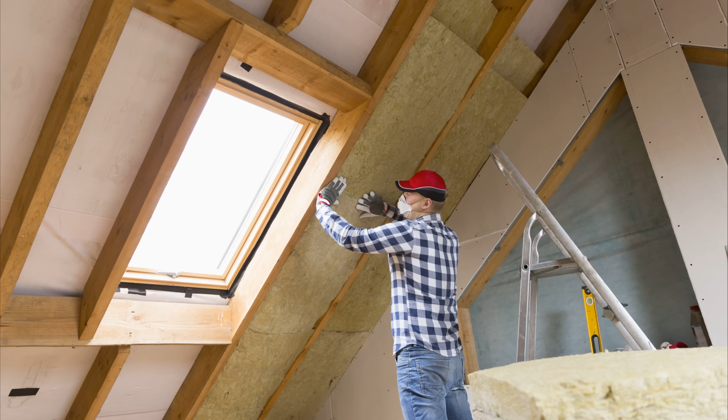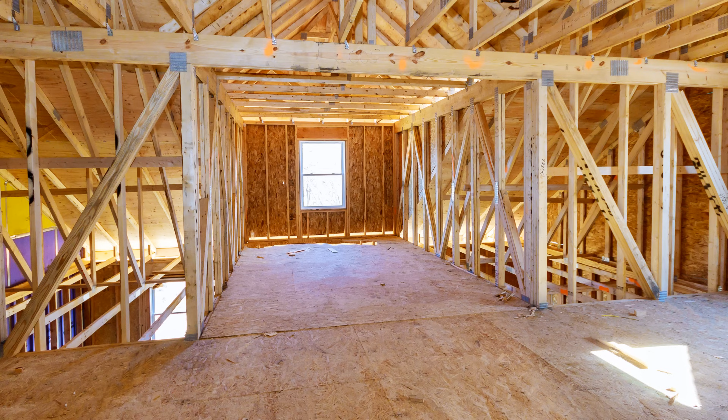Unvented roofs, or conditioned roofs, have a bad reputation in the building community, as we see a lot of problems with poorly designed unvented roof assemblies, leading many builders and design professionals to avoid them entirely. However, when designed properly, they can actually outperform vented roofs in basically all climates.

And whether or not you have some form of moisture control. Just because the roof is unvented, that doesn't mean we aren't introducing some form of air change or a moisture removal mechanism. That's why we refer to unvented roofs as conditioned roofs—they actually need to be conditioned.

So let's first talk about the assembly design of conditioned roofs. There's several strategies we can use to prevent moisture from condensing on the backside of the sheathing. The best strategy is to install rigid insulation outboard of the sheathing at a sufficient thickness to warm the condensing surface. The amount of rigid insulation needed is completely dependent on the climate zone you're building in, the R value of the rigid insulation product, and the total R value of the roof assembly.

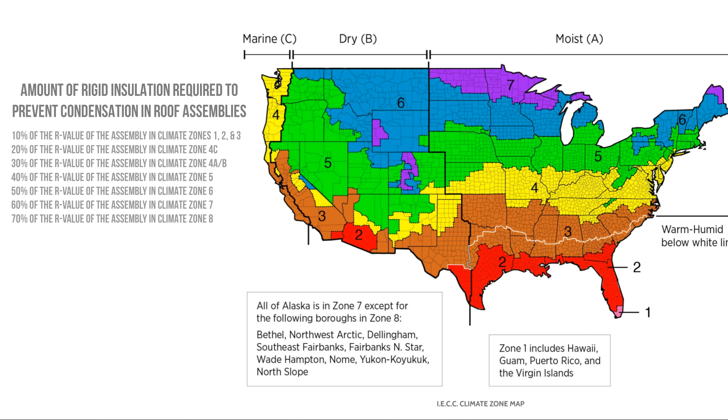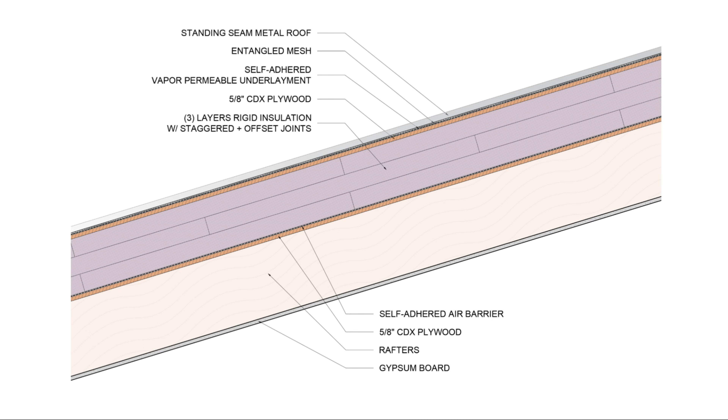Obviously, colder climates are going to require a larger ratio of rigid insulation to be installed outboard, whereas warmer climates will require less. If we install all of the insulation outboard of the sheathing, we have what we call the perfect roof assembly, in which the roof structure experiences the same temperature and relative humidity as the rest of the conditioned space.

We also want to make sure the roof assembly is airtight, so we specify either a self-adhered or fluid-applied air barrier over the sheathing to prevent convective looping at insulation joints that could end up depositing moisture within the assembly. We also want to install rigid insulation over that, preferably in multiple layers with staggered and offset joints to prevent energy loss and cool temperatures from reaching the sheathing at the seams.

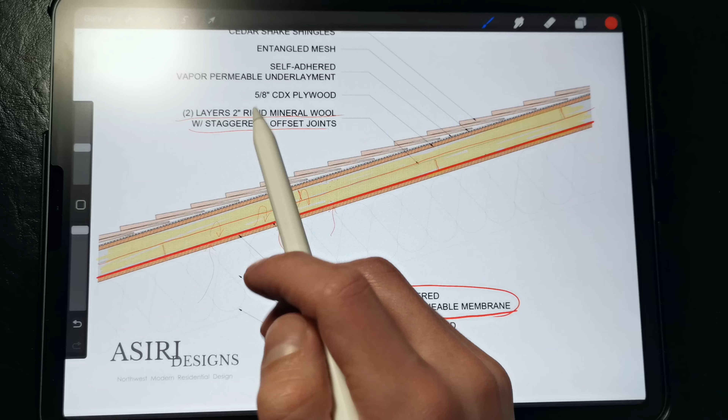Next, we want to install an additional layer of sheathing over the rigid insulation to provide a fastening base for the roofing material, then install a vapor permeable underlayment and the finished roofing material. For installing wood shingles or metal roofing, we want to provide a drainage plane with some entangled mesh to ensure water doesn't get trapped and cause issues.

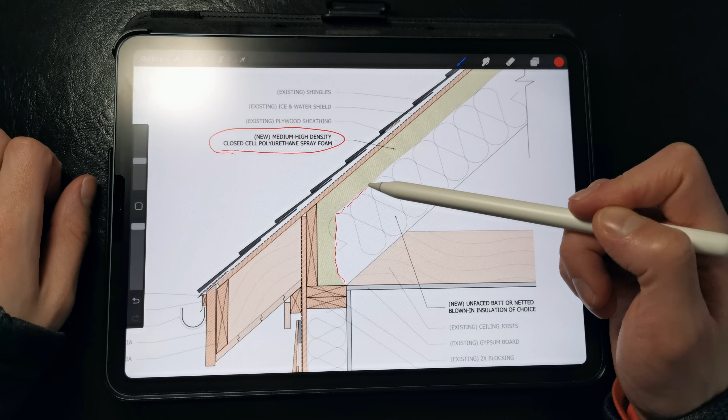Now, if we can't use rigid insulation outboard of the sheathing, we can either use closed cell spray foam on the underside of the sheathing, sealed rigid foam boards, or a taped smart vapor retarder membrane to prevent condensation. There are caveats to all these strategies, specifically spray foam, which we tend to see the most issues with, especially in cold climates, but we do have these other options at our disposal if we're diligent about the details.

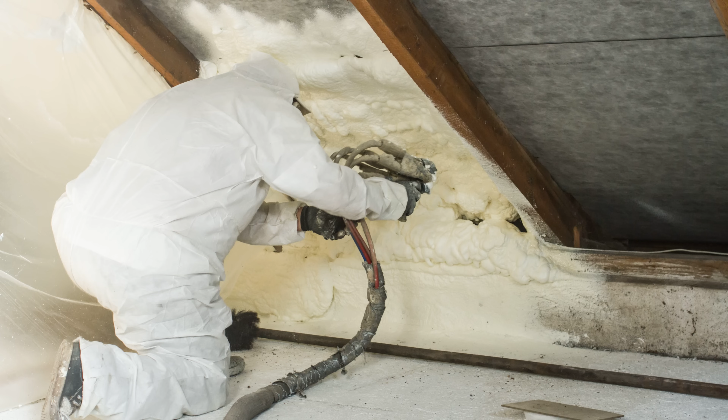Myth number 2: you have to use spray foam. Building off our previous myth, you're not just limited to spray foam as a solution when it comes to a conditioned roof assembly. Quite frankly, I think you should avoid spray foam wherever possible due to its potential to crack in cold climates, and perhaps more importantly, its tendency to off-gas chemicals even long after it's been installed, with some odorless chemicals off-gassing even months after installation.

I've talked about this before in previous videos, but we've had issues with spray foam odors and off-gassing as confirmed by multiple third-party lab testing.

This wasn't bad spray foam, and it was actually installed properly, so we tend to avoid it now for those reasons, and either opt for rigid foam insulation installed outboard or a foam-free option using a smart vapor retarder.

So in this conditioned roof assembly, you'll see that we have no foam products whatsoever. We don't have any exterior rigid insulation, so how are we controlling vapor diffusion and air leakage that could deposit moisture and cause condensation to form on the underside of the sheathing?

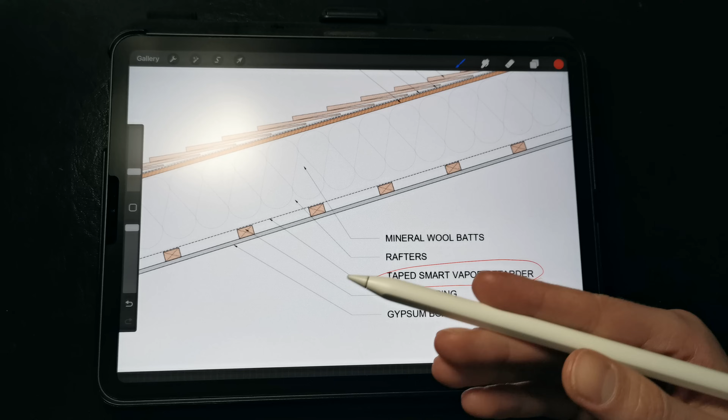Well, we're specifying a taped smart vapor retarder membrane. If you watch this channel for any length of time, you know that I like to use this for a lot of different applications, because quite frankly, it's a more affordable option to rigid foam products and spray foam, and we can get a pretty solid air barrier if we do a good job about taping the membrane.

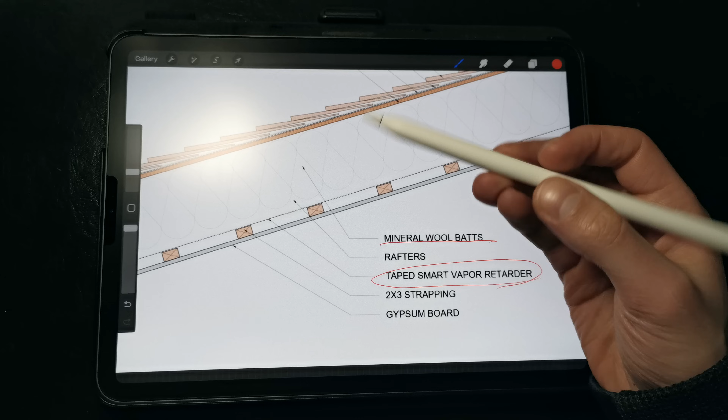It also provides us a lot more flexibility in terms of what types of insulation products that we can use inside the rafter cavities. In this case, we're calling out mineral wool batts, but we can also use netted blown-in cellulose insulation, wood fiber insulation, or fiberglass. I like to use mineral wool because it won't support rot, it's vapor open, and it provides additional fire resistance to the assembly, so mineral wool is a great option here.

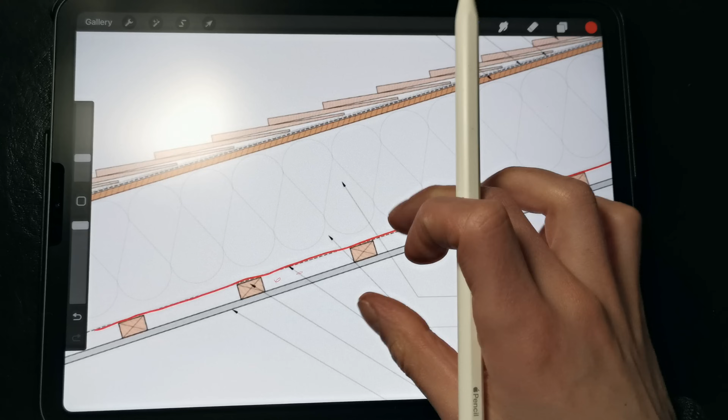So we want to install our mineral wool batts within the rafter cavity like this, and then we're able to staple the smart vapor retarder membrane to the rafters, taping all of the seams, joints, and penetrations in that membrane, and then we have the option to install some 2x3 strapping, which will provide a service cavity if we're planning to finish the ceiling of the space, or if this will be a simple attic space, we can leave it as is with that exposed membrane. So we have options at our disposal here.

Then, installed on top of the assembly, we have a self-adhered vapor permeable underlayment that's been installed over some CDX plywood sheathing. Could we use OSB? Absolutely. But here we're using plywood for the enhanced drying potential, since plywood becomes a lot more vapor permeable when it gets wet. It also has a much higher hygric buffer capacity compared to OSB, so it won't fail as quickly if it gets wet.

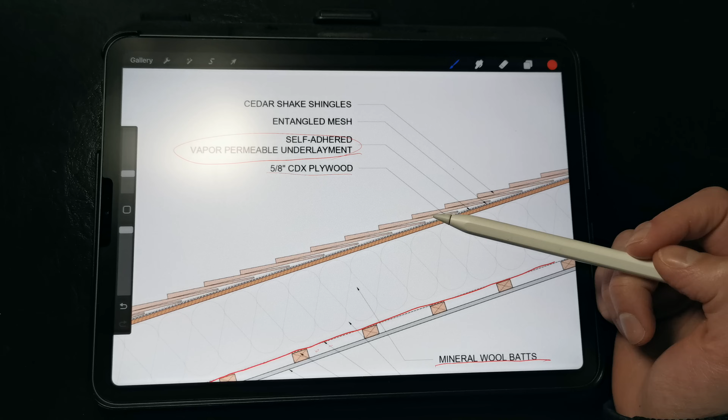And then the self-adhered vapor permeable underlayment will provide a watertight and airtight layer while allowing moisture to dry out of the assembly if water leaks through the penetrations or if we happen to get condensation within this space.

Installed over the underlayment, we have an entangled mesh like cedar breather, and that will provide a drainage gap and break capillary continuity, allowing these cedar shingles to dry out easily when water gets behind them, keeping them durable for a long time. Same thing if we have a metal roof, we want to provide a small drainage gap to prevent moisture accumulation that could lead to localized corrosion.

Myth number 3: unvented roofs cause ice dams. Alright, I'll admit there's actually some truth to this one, but it's an easy modification that we can use to address this. But first, it's important to understand exactly what ice dams are and how to prevent them.

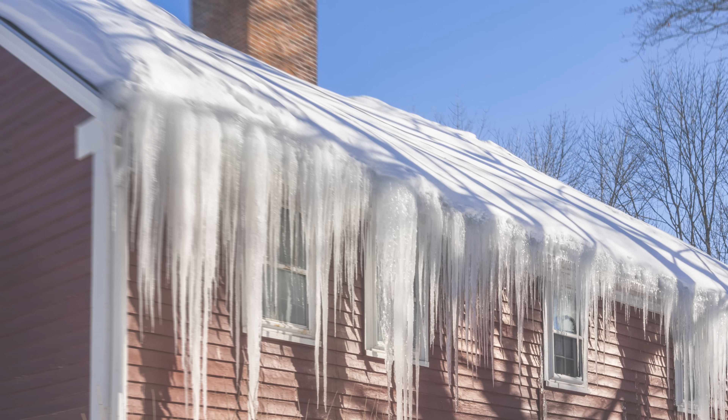Ice dams are those buildups of ice and snow that you tend to see on some roof assemblies, with large icicles that extend down from the eaves. For those who haven't seen them, this is what they look like.

Now, how these ice dams form is that we have snow melt on the surface of the roof due to the heat loss from the interior, coupled with the thermal resistance of the snow that's built up on the roof. Snow is actually a decent insulator at between R1 and R2 per inch, which means that if you have a foot of snow built up on your roof, you could be adding an additional thermal resistance of R12 to R24 on top of the roof assembly, and that's more than enough to warm the surface of the shingles to cause the bottom layer of snow to melt.

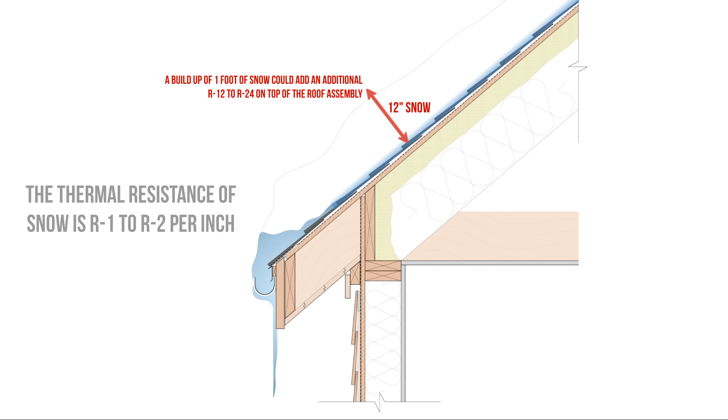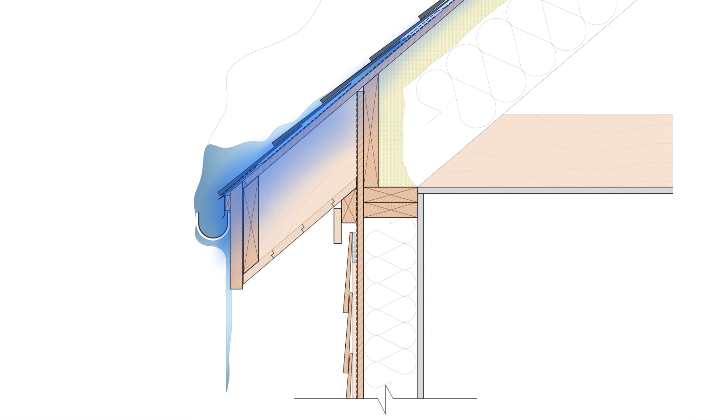The water that runs down the surface of the roof comes into contact with the eaves or overhangs, which are not part of the conditioned space, and therefore are colder, which causes the water to freeze at the eaves. Eventually, we get a buildup of ice and snow at this location, and when the ice dam melts, it can actually get underneath our waterproofing materials in our roof assembly and cause leaks to form in the roof, which is why you tend to see ice and water shield being specified over the roof eaves.

Now keep in mind, this is generally if you're building in a cold climate with a high snow load. Usually we're talking about a ground snow load of over 50 pounds per square foot.

Vented attics do a great job at preventing this, as the roof sheathing is uncoupled from the heat loss of the building. We have cold air entering the attic, keeping the temperature of the sheathing and the shingles close to outdoor conditions, and the roof venting flushes any heat from the roof assembly before it has a chance to accumulate.

So what can we do to prevent ice dams in unvented conditioned attics and roofs? Well, it's simple. We build a vented roof over the conditioned roof, sometimes just called a vented over roof. This uncouples the heat loss of the building from the surface of the roof, keeping the sheathing and the roofing cold and closer to outdoor temperatures.

We simply install furring strips over the roof sheathing or over the rigid insulation, providing continuous air intakes at the soffits or fascias, and vents at the top. We install an additional layer of sheathing for a fastening base, a vapor permeable underlayment, and the final roofing material.

Myth number 4, unvented roofs will make your shingles blow off. Wet rotten sheathing is what causes shingles to blow off on any roof, whether it's vented or unvented, since we get a loss of withdrawal strength.

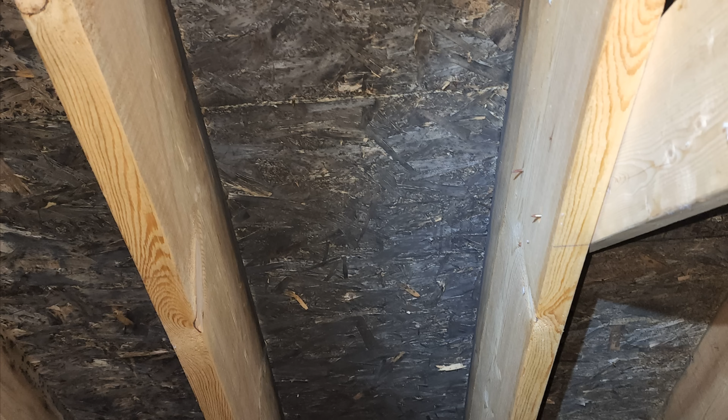Now, we can get wet sheathing in an unvented roof if we don't control condensation, air leakage, and moisture accumulation within the sheathing. One classic example of this is actually in open cell spray foam roofs.

While open cell foam can provide the benefits of an air barrier, it's still highly vapor open, even at greater thicknesses. Vapor diffuses through the open cell foam and gets stored in the sheathing, increasing moisture content over time if we don't have some form of moisture removal in the space, and then we tend to get rot and then our shingles blow off.

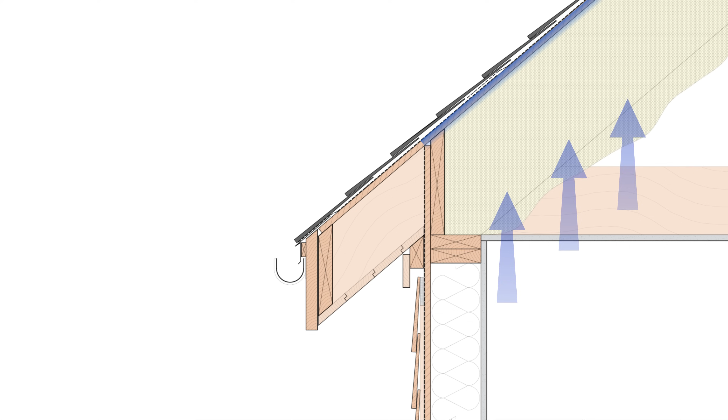Myth number 5, unvented roofs are hotter than vented roofs. Roof venting actually has very little impact on attic temperatures unless we're comparing uninsulated roof assemblies. Insulation, air tightness, and thermal bridging are what have the biggest effects on heat flow in a building.

Insulation is what slows the flow of heat. If we're doing a good job about insulating the space and providing a thermal break, our conditioned attic is going to stay close to interior temperatures.

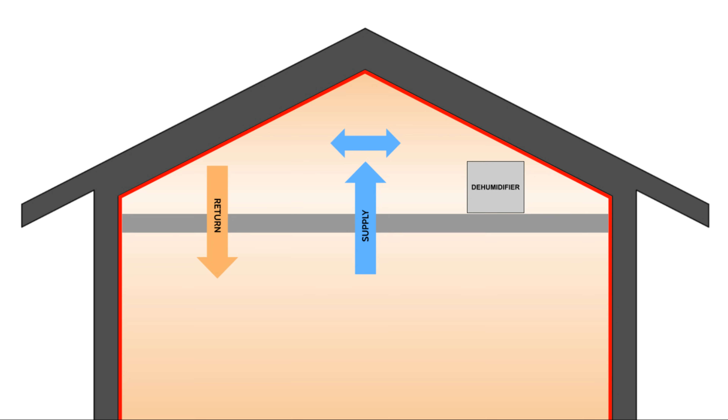Also remember that our unvented roofs should be contained within the conditioned space, meaning that it needs to receive some air change. This means that presumably we'd have a supply and return duct within the space, providing conditioned air and exhausting stale hot air that rises and ends up in the space.

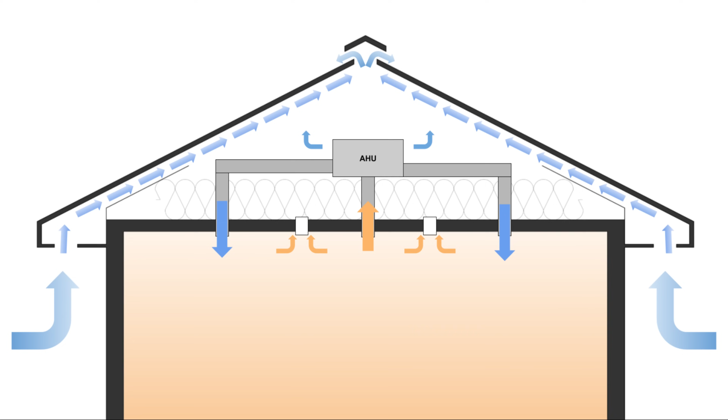The fact is that the color of your roofing material will actually have a bigger impact on temperatures than venting. Something else to think about is that if we're air conditioning the interior space, the negative pressures exerted by the vented roof will tend to suck cool air out of the home through poorly sealed penetrations and other air leaks in the ceiling plane.